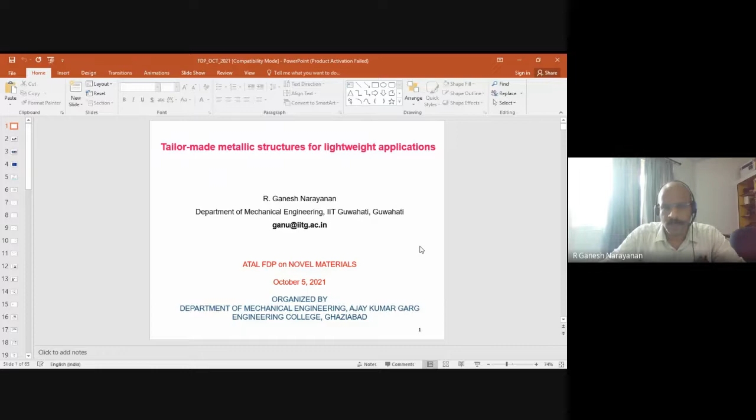Anyway, I think now I am zooming it a little bit and then we will start the session. Okay, sir, I think it's visible, no? Yes, sir. I can go to second slide and you can see this figure. Okay, fine, I think we'll start.

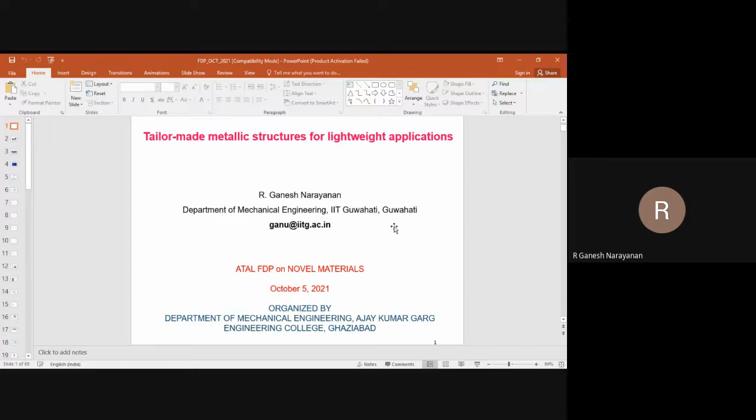And you also know that with materials development or modification in materials, processes also developed. Because not all materials can be manufactured into components with those raw materials with only some processes - a different manufacturing process is needed. So naturally, the original manufacturing process meant for forming or joining of the earlier materials may not be suitable for these new materials or modifications in the original material. So, in parallel to materials development, manufacturing processes also got developed. Basically, it is a materials-manufacturing combination - materials development is supported by manufacturing process, and manufacturing process is also supported by materials development. These two developments cannot be separated.

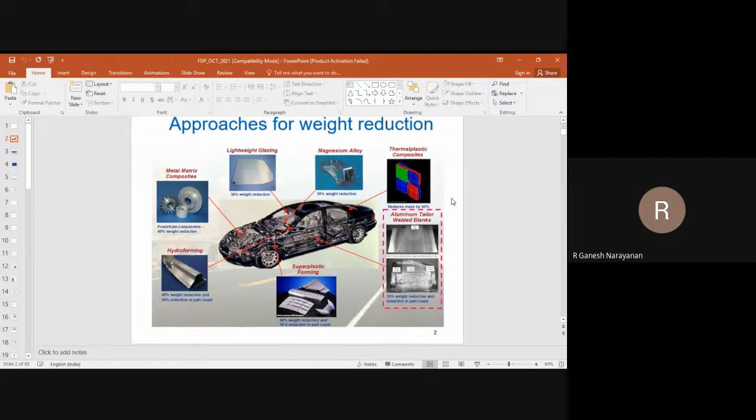So now let us move on to the next slide, and I'm defining here what is the meaning of this tailor-made sheets. So this tailor-made sheets, as the name suggests, basically you can combine sheets like a tailor. This is not something new. Only thing is, people don't usually speak about combining various materials or sheets of different thicknesses or materials.

People spoke about this long before also. For instance, our LPG cylinders are made by two deep drawn components welded at the center. So that type of welding and making a metallic structure is already there - that is not something new. But what is new in this is you can combine different materials and different thicknesses. The more the difference, the more the problem. So sheets of same or different thicknesses and properties are welded, which means they are tailored to a specific shape and size. That's the point here.

Okay, so you have one aluminum grade, you have another aluminum grade. Maybe different grades and different thicknesses, or different grades same thickness, or different grades different thicknesses. Any combination you can weld at a particular portion, and then you can deform that material, form that material to make a component. That is the context here.

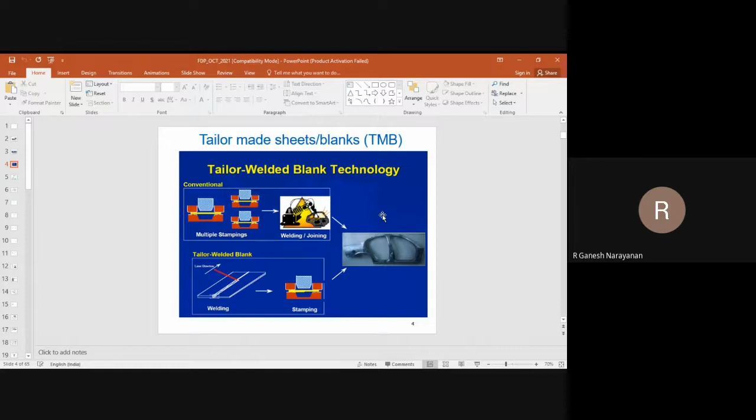So why tailor made blanks? What is the need for that? As the name suggests, it is mainly required for weight reduction, blank weight reduction, number one. And number two, as a result of that, you have fuel consumption benefits, there are a lot of opportunities for cost reduction. And the different components may need different property requirements at different locations.

Say, for example, local strength resistance, local corrosion resistance you may need. So in that case, the material combination is possible in tailor-made blanks or tailor-welded blanks, to make it very specific. So that gives flexibility for component designers. The fourth point, as I mentioned, you can work on different materials and thicknesses.

So there are hundreds and hundreds of journal papers by now in this subject, and that is mainly because of the existence of such technology, right? So we have flexibility for academicians also. But at industry level, you will see that the component designers also have got flexibility. Scrap utilization, which is very important.

So you know that you have a particular size of a sheet, or any metallic structure which will be a scrap. Of course there are strict scrap utilization methods, but what is important here is that scraps can be utilized to make tailor welded sheets or tailor made sheets. And there are chances that you go for fewer spot welds.

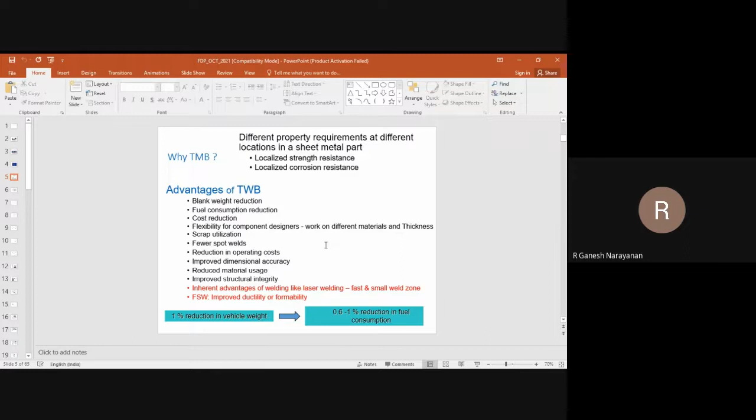You also know nowadays we speak about e-vehicles, isn't it? The fuel concept itself is gone. It's more on the battery aspect. Now there also people speak about lightweight components, lightweight batteries, use of different materials, all those things.

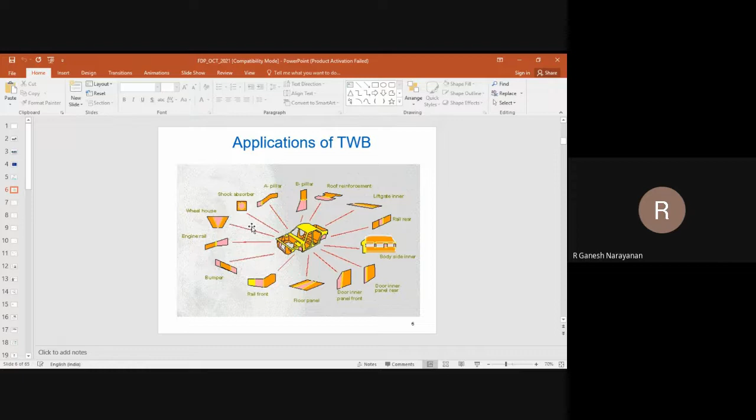It is also possible that in the cars that we use in day-to-day life can have such components already existing in it. Probably we may not know, because the weld zone is going to be very small. We may not even know it.

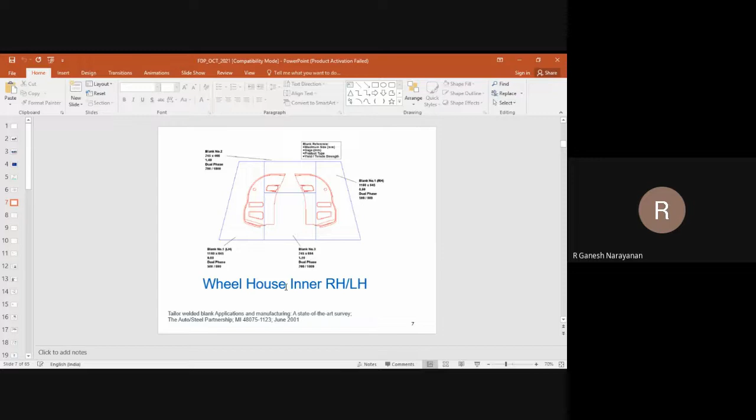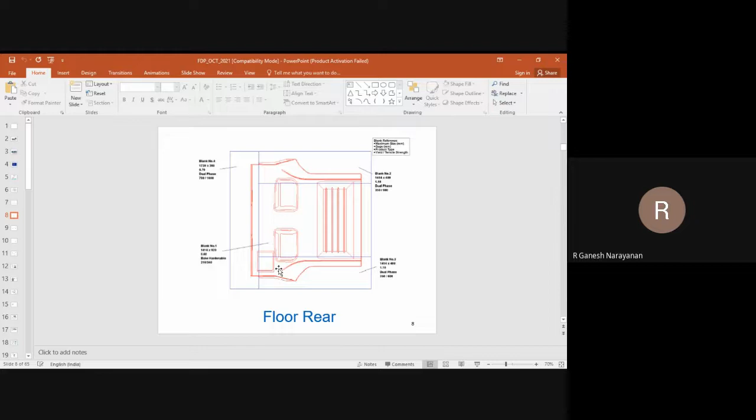This particular component is called wheelhouse inner, floor rear. Here also you will see dual phase steel, dual phase steel, dual phase steel, and different material combinations: 350,600 with 210/340 and 700/1000. And 0.7 is to 1.1 is to 1.1 is to 0.6. 1, 2, 3, 4 — four different materials totally. They are welded here.

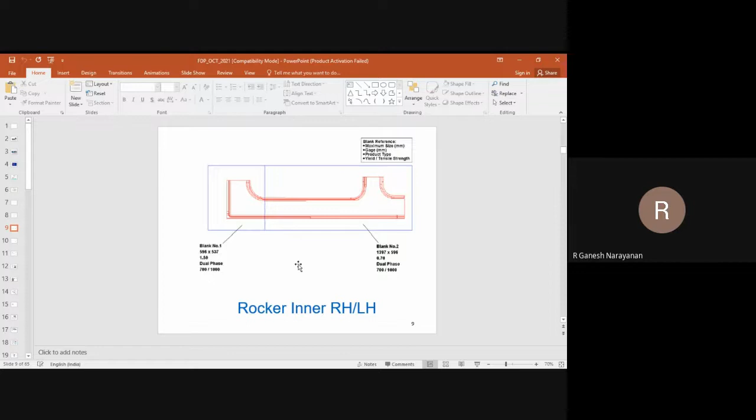Body side outer is a very classic example: 1,2,3,4,5 — five different parts are there. This is bake hardenable steel, dual phase, bake hardenable steel. These are all different high strength steel and advanced high strength steel. We are not going to discuss much on that, but this will give you an idea of what kind of materials are used: 0.7, 1.5, 1.8, 1.2, 0.7. So these are all a variety of materials and thicknesses, welded together to make this particular component.

Ultimate aim is weight reduction and component efficiency, improving the component efficiency. Again, different examples: you can have a single straight weld, multiple straight welds. I gave you an example — single straight weld, here you can see multiple straight welds.

Angular welds are possible, we have seen examples. Non-linear weld lines are also possible, you can have curvilinear welds. That depends on how you optimize the size of the sheet and shape of the weld.

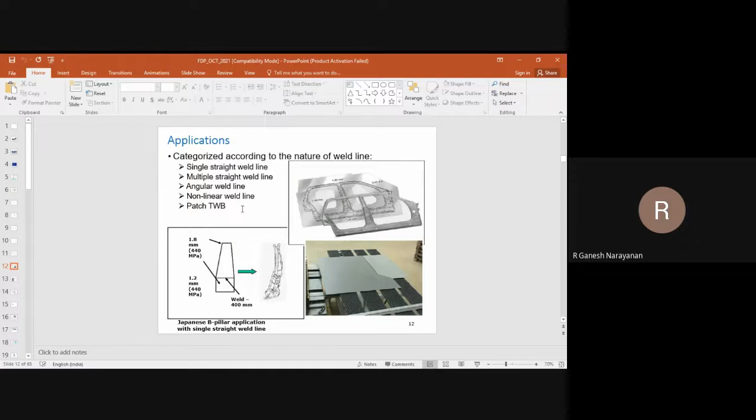Patch TWB is also possible. Patch TWB means you keep the sheets one above the other, like I gave some example here. This is before forming, and this is after forming. You can see one sheet is above the other. There are two patches joined with spot welds actually, but this is also called tailor welded blanks. Instead of joining them in a plane, this is made one above the other.

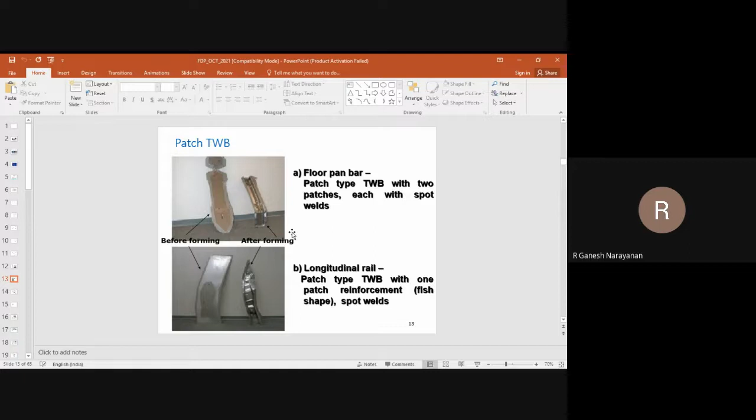So now, with this introduction, we are slowly moving into certain important, crucial parameters which determine the overall forming behavior of these tailor welded blanks. Later on, we will extend that for other methods of making these tailor-made sheets. In that context, I would like to tell you very briefly about something called the forming limit curve.

This forming limit curve is generally drawn between major strain and minor strain. The curve itself is this V-shaped curve inside the diagram, and the whole diagram is called the forming limit diagram. This is mainly used to evaluate the formability of sheets.

Like tensile behavior, like we generally do in the lab also, isn't it? We take a rod or a sheet, make it into a dog bone type of shape, and then do a tensile test in a UTM to get its stress-strain behavior and various mechanical properties, correct?

So now the point here is this forming limit curve is also like that kind of material property. If you don't do anything to the material, the forming limit curve generally does not change, like stress-strain behavior. And in stress-strain behavior, you have something called ductility.

Ductility gives you some idea about the limit of useful deformation. We know uniform elongation and total elongation, correct. Uniform elongation corresponds to UTS, and total elongation is at final failure. These two quantities are generally used to quantify ductility. But generally total elongation is the ductility - we say 30% means you can deform the material up to 30%, and within that you get useful forming behavior, formability, or useful permanent shape change.

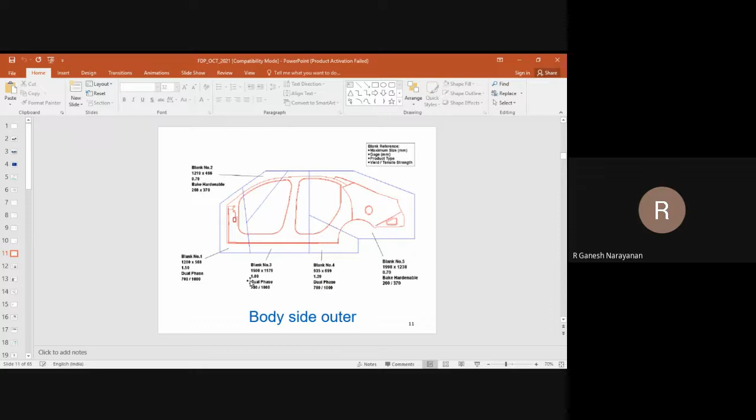Thickness ratio - I already gave you several examples before. Thickness ratio means thinner sheet thickness to thicker sheet thickness. For example, here, if you see 1.5 to 1.8, and then 1.2 to 0.7. So if you take these two sheets, left and right, 1.5 to 1.8, that 1.5 divided by 1.8 is nothing but the thickness ratio.

Sometimes you can do vice versa also, thicker to thinner also possible. Similarly, you can have strength ratio also.

Then weld orientation comes into picture. What is the orientation of weld with respect to loading direction - that comes into picture. Materials welded, that's what I told you, strength ratio.

Welding process adopted - laser welding, friction stir welding, we will see some examples. Which welding process are you going to use? Same material, same thickness, but what process are you going to adopt? Welding parameters - once you enter into one welding process, there are several parameters, right?

For example, take laser welding - examples are speed, power, intensity. For friction stir welding, I will give you some examples - there are several parameters.

Weld orientation with respect to rolling direction of the sheet is also important. Here, weld orientation is relevant to loading direction; here, weld orientation is with respect to rolling direction. Both are important. So loading direction, rolling direction, weld orientation - these three combinations are important.

So what I am saying is, other than the properties of one sheet, there are specific additional properties which are important when you speak about tailor welded sheets. We are going to see some examples of how this affects formability.

Quick examples I will show you here, from existing details - effect of thickness difference and material difference, that means thickness ratio and strength ratio. Along with that, I will also highlight some important details in each one.

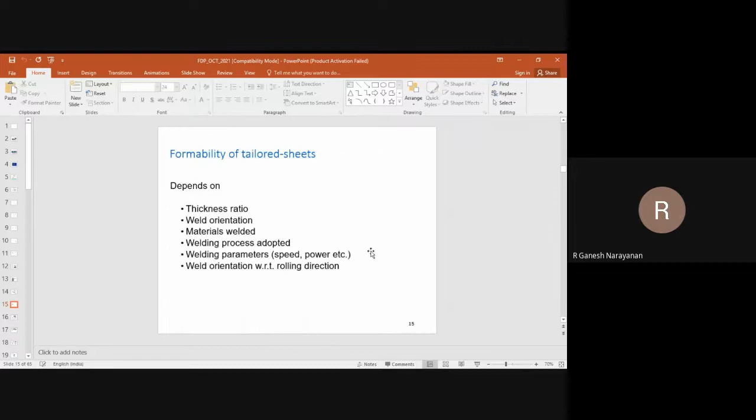This is another example I will give you. Here again Nd:YAG welding is used, the material is a cold roll steel sheet of a particular composition, carbon composition is given, laser details are provided, you can go through this. Shielding gas is again argon, with a gas flow rate of 10 liters per minute. And here the thickness combinations are different.

Thickness combinations are 0.7 to 0.8, 0.8 is to 1, and 0.7 is to 1. To get a good weld in these combinations, the power and welding speed also changed. Welding speed remains same at 40 mm per second, but power changed. Only in those conditions will you get full penetration, and that is why it is changed.

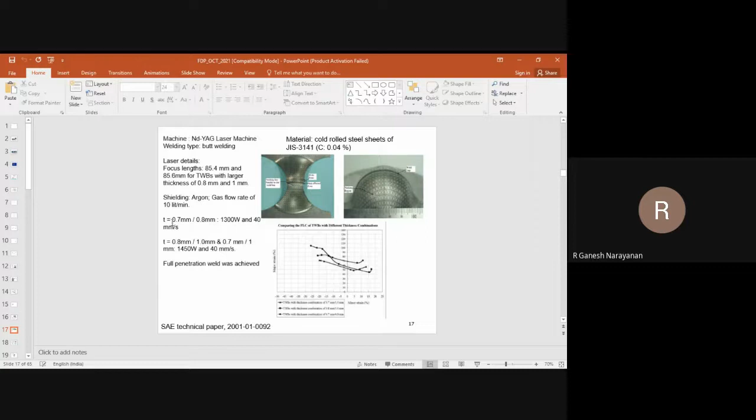It is also possible that you can change material grades also. See, there is one problem in changing the strength of the material. You cannot change the strength of the material alone, keeping all other properties constant, for practical reasons. That's simply not possible. Thickness, to some extent, yes. But then thickness is also a critical question, because when you combine 0.7 is to 0.8, that doesn't mean other mechanical properties are constant between 0.7 and 0.8. That is not possible. But in strength, it is simply not possible.

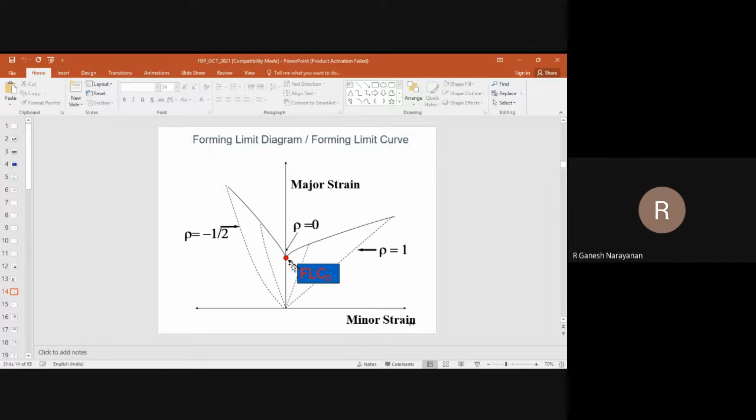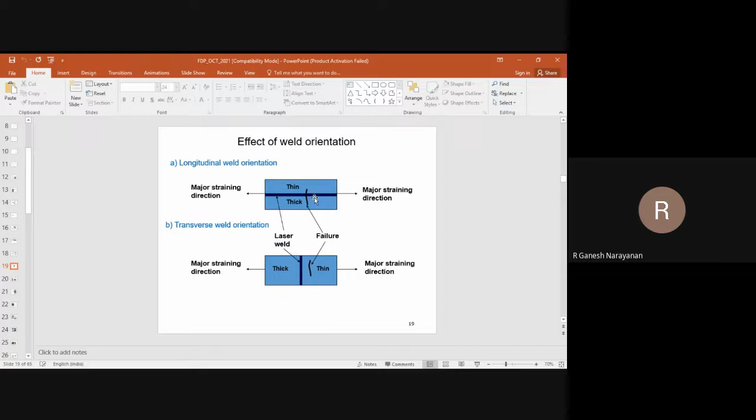Whichever is weaker, the thinner sheet or the weld region, that will fail. I have shown here a failure happening in the thinner one, but you can have failure in the weld zone also. In longitudinal orientation, however, it is always going to be perpendicular.

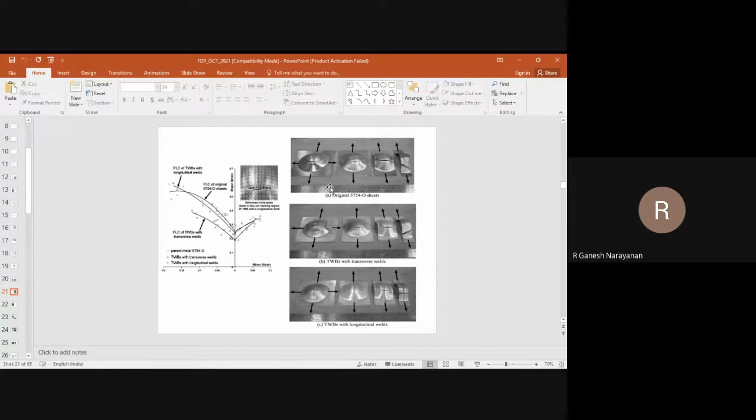See, I have not explained all that. There are separate standard procedures to get forming limit curve of any material, including tailor welded sheets. Like you have standard procedure to get stress-strain behavior.

In a component, location of weld is very important because the weld should not be in a location where failure is going to happen. See, in any component, failure is going to happen in a particular location. Of course, you cannot predict failure because it depends on the material heterogeneity, how it develops, all that. But let us assume that failure is going to repeatedly happen in one particular location. Then it means that weld should not be at that location. It has to be away from that.

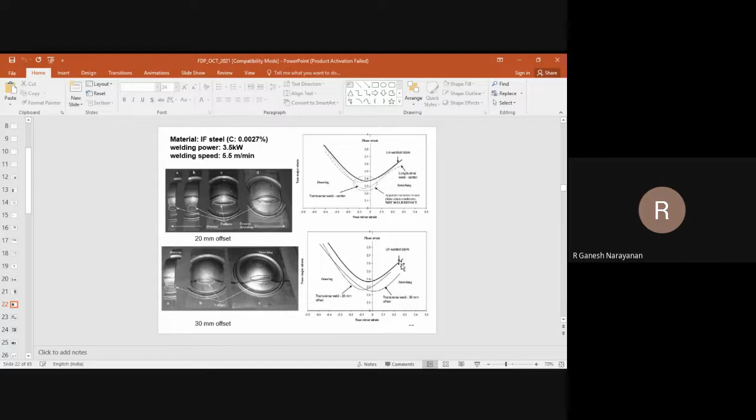Okay, crashworthiness of tailor welded blank is very important. Crashworthiness means like a crash type of situation - how worth is the tailor welded blank in doing such type of situation is basically determined by crashworthiness. Like I gave an example of a bumper, isn't it? Which is generally seen on the front side of any automotive car, or a Jeep, right? So when it hits a rigid body, like a wall or something, or during an accident, that is the main part which is going to take up the entire shock, isn't it?

So if you're going to make such type of components with the tailor welded blanks, what's going to happen? That's what it's going to tell you. They have made tubes, square tubes out of tailor welded sheets, and they are going to actually crush it, either by quasi-static test or by dynamic testing.

Okay, and they have used DP600 with different thickness combinations, you can see, and axial crushing test was performed, and they have also done different orientations. Okay, I'll slightly zoom it so that you can see this bar chart. After that, I will unzoom it. Okay, so you will see that. Oh, sorry.

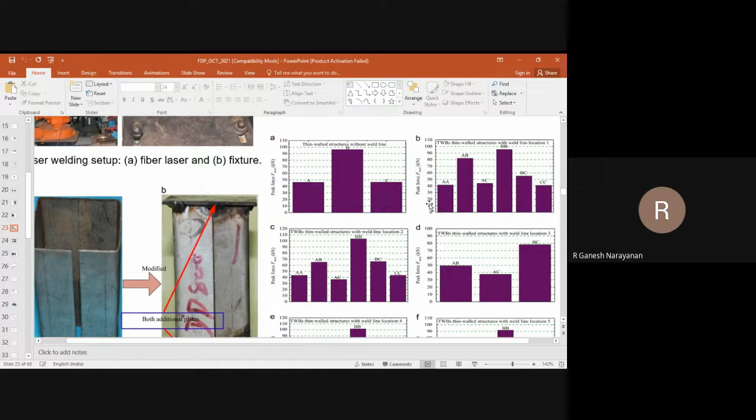Let us zoom in and see this. So the y-axis is peak force, and the x-axis has some nominations they have. The nominations are A, B, C. These A, B, C are different combinations. That much I can tell you, and I can tell you that peak force is different for different combinations.

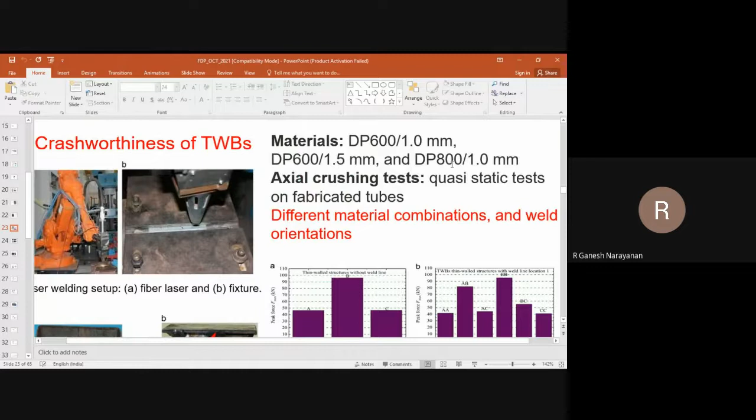A is for one particular welded blank. Let us say DP600 1mm, DP600 1.5mm, DP800 1mm - A, B, C you can keep. And you can see the peak force during that axial crushing test is this much for different combinations: AA, AB, AC, BB, BC, CC.

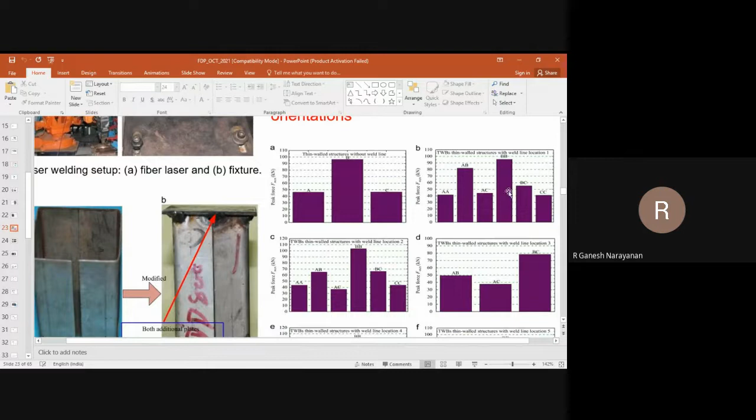This is with weld orientation or weld location 1, weld location 2, weld location 3, and different combinations. All are possible, and they have evaluated the peak force. In all these combinations, the main idea is which material is good - whether A is good, B is good, or C is good - and which combination is good.

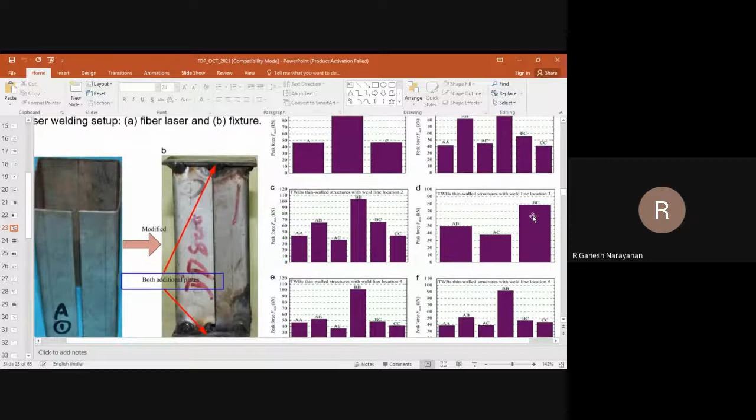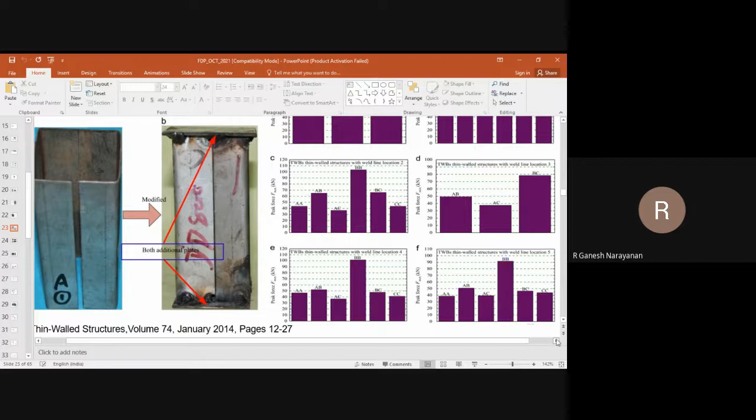You can see BB can take larger peak force. In this case, BC can take it. In this case, BB, and in this case, BB. So depending on the combination of material and weld location, which material is good can be optimized from this particular graph. I'm just trying to appreciate the outputs they measured and how they select material.

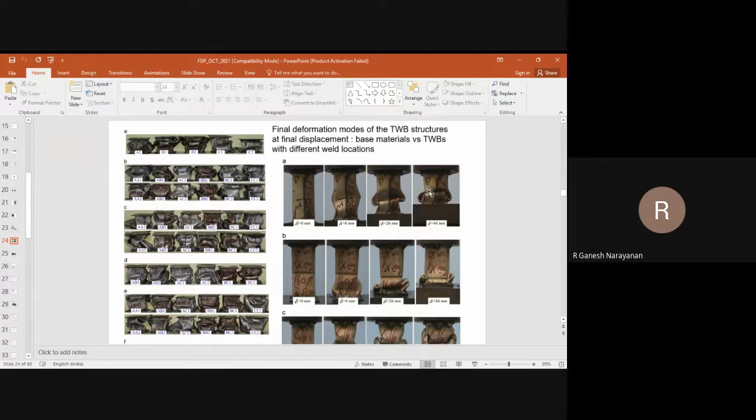These are some photographs at different stages showing how the material deforms during axial crushing. This is quasi-static - basically in a UTM, just compress it. And the failure behavior also shows different stages. You can see different combinations at 0, 6mm, 26mm, 44mm. They take photo shots and have given you here their forming behavior, failure behavior, and the bending pattern also is going to be different.

One should appreciate the combinations of this, and whichever is acceptable, we have to pick up that kind of material combination and use it for making such type of components. So other than forming behavior, crushing is also very, very important. That's what this diagram, this study is going to tell.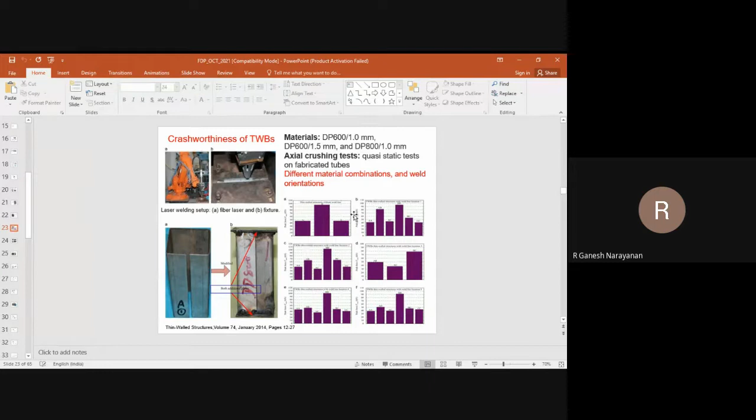Along with that, different material combinations, different thicknesses, different orientations. You can see in the last photograph, the bottom C photograph, the 45-degree orientation. The first one is longitudinal, the second middle one is transverse. Forming limit, tensile behavior, crushing behavior, thickness ratio, strength combination, orientation, location - all these things are important given a particular welding process.

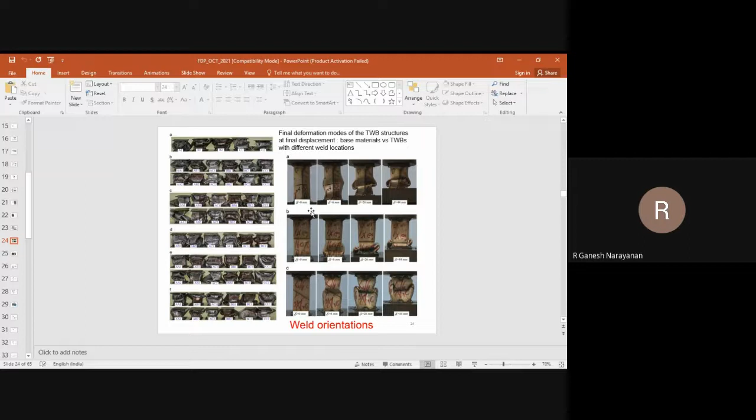Now there are some problems in welded blanks. One important problem, of course, is forming limit is reduced, ductility is reduced, and you have to enhance it - all those things are fine. Typically, the weld line moves. When you perform deep drawing, the weld line is not going to be at one location - it moves to a different location after the component is made.

For example, you can see here this round cup is formed, wherein the weld has to be at the center, right? But you will see in the first photograph, the weld is at a critical location. In the right side photo, the weld is at the center - that is because they have done something with the process.

Why does the weld line move? It moves because there is different drawing resistance in the materials. One material will have one drawing resistance compared to the other, so one is going to pull the other material, and the weld line automatically moves. But we don't want that, right? We want the weld to be at one particular location only. So how to avoid this weld line movement?

The first way is giving different blank holding force. In this case, a constant blank holding force is used - that is 5 tons. But in this case, if you see, they have used a variable blank holding force - on the thinner side they use 10 tons, on the thicker side they use 1 ton only. So you resist the movement of the thinner material so that your weld zone stays at the center. So one way to avoid weld line movement is to provide different blank holding force.

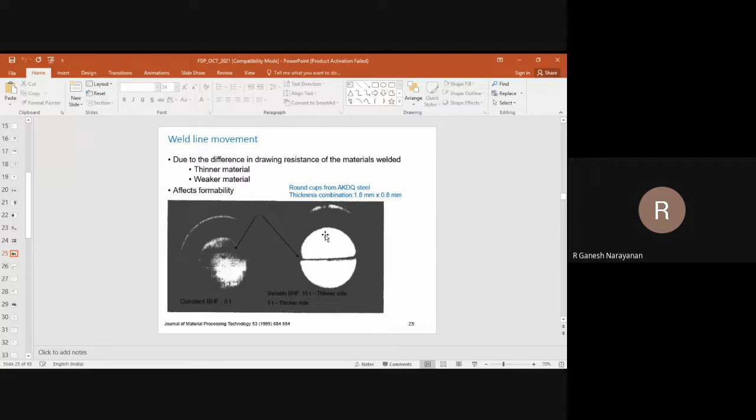Draw bead can be used on the thinner side. When you do deep drawing, one side is thinner, one is thicker. The purpose of draw bead is to resist the weld line, resist the sheet movement. So you provide draw bead, or different profiles or dimensions of draw bead, on the thinner side, while on the thicker side you don't have draw bead at all. That way also you can resist the weld line movement.

Location of draw bead - this is very common sense, right? So you made a laser welded blank with beam power, welding speed, flow rate, everything fine. Now for thickness combinations like 0.8 to 1.2, 0.8 to 1.6, for one particular steel - this is common sense - when you know finally the location it's going to end up at, you can initially place the weld line at an offset, so that when you deform the material, it ends up at the desired location. That's what they have done.

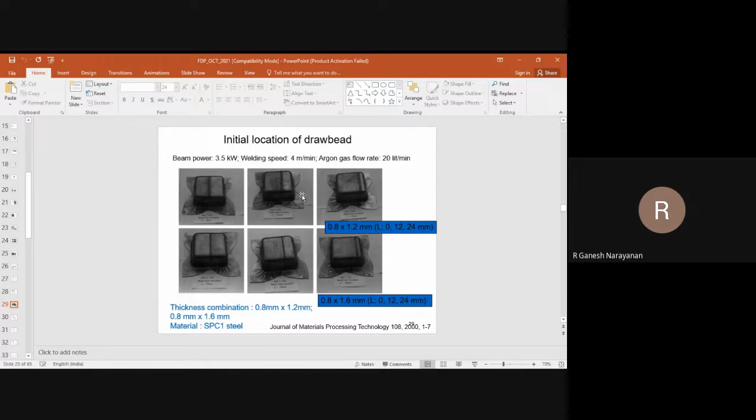These are some data points available. So weld line movement can be avoided. I'm just summarizing that by providing different blank holding pressure, a different clamping system, provision of draw bead with different dimensions or shape, and by changing the initial location itself. These are certain important methods of avoiding weld line movement.

Now another important problem: suppose you make tailor welded blanks using laser weld, and you know the laser weld generates a weld zone which is very, very small. Sheet properties you can get from tensile test, correct? How do you get weld zone properties, since its width is very small? There are some strategies available, because when you do modeling - I'm not showing any example for modeling, but I'll tell you the significance - you have to give input for weld zone properties, the entire stress strain behavior has to be given as input.

So how do you get weld zone properties? There are two different methods. One, you make a tensile sample such that the gauge width is occupied by the entire weld zone only. In this photo, you see only the weld zone is available, no base material. You clamp it in UTM and do tensile testing, and you get a stress strain behavior. That is nothing but the stress strain behavior of the weld zone - true stress versus strain, I am giving here, you will get this.

But you have to fabricate a sample like this. You have to use wire EDM to cut the sample such that there is no base material combination, all those things. There are other methods also - a simple mechanics approach is also possible.

Suppose you take a longitudinal weld like this and do tensile testing. Load sharing principle is possible - the total load will be equal to P1 plus P2 plus PW. That can be converted into a stress strain behavior, giving a simple equation between sigma W and epsilon W. These are variables: K1, N1, the strength coefficient and strain hardening exponent of base material 1, similarly K2, A2, N2 for material 2. Area can be evaluated, P is the total load given by the machine. So you substitute all these properties, and for different values of epsilon W, you get different sigma W, giving you the stress strain behavior.

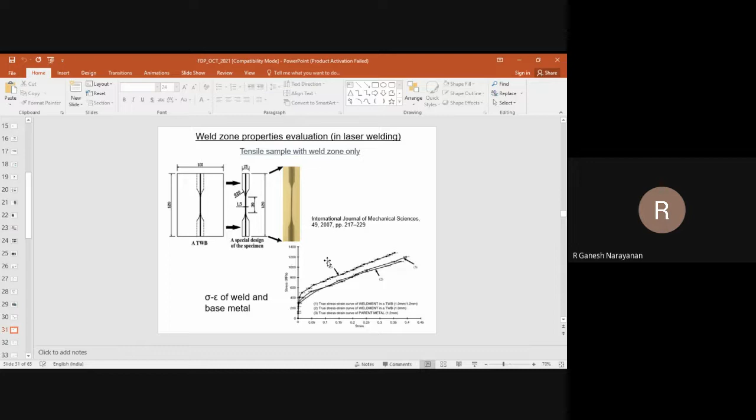The same thing is also possible in transverse weld. Only difference is in longitudinal weld, load is additive, while in transverse weld, strain is additive. Load is the same in all the regions. In that way, you can get this stress strain behavior analytically also.

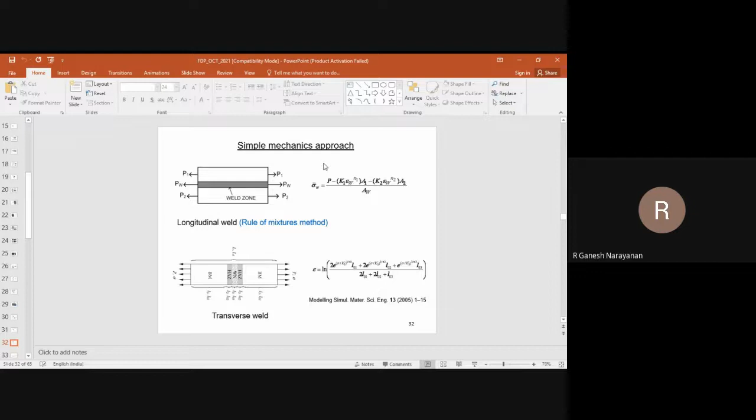There are some research papers where you can compare these two. All those things are possible. Let me give you an example of how they evaluated it.

So now, other than laser welding, there are other welding methods. Friction stir welding is one more method.

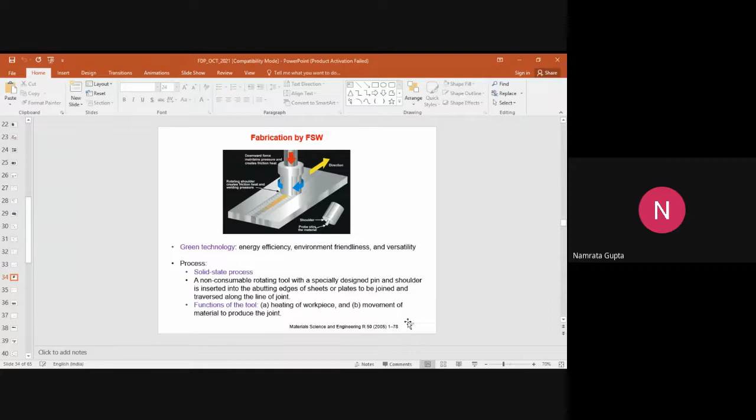So that's what about laser welded sheets. Similar concepts, whatever we discussed, are suitable for other welding processes also. So the only thing that's going to change is the welding parameters.

Now friction stir welding is another process people use to fabricate such tailor-made structures. And you all know that friction stir welding is a solid-state welding process. It basically uses a rigid tool, or non-consumable tool, you can say.

It has a pin and a shoulder, like the way it is shown here, and it is inserted into the plates or sheets to be welded. It gives an axial force on the sheet, and it is also rotated and traversed along the direction in which you are going to weld. So mainly the welding happens because of plastic deformation of the plates or sheets and material mixing.

Unlike fusion welding processes like laser welding, here it happens in a solid state. It's a green technology, it has good energy efficiency, environmental friendliness, eco-friendliness, and a lot of flexibility and versatility.

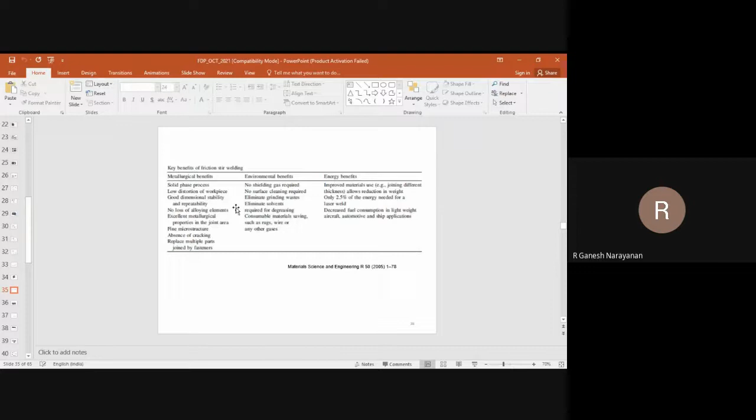Energy benefits include improved material use, different thicknesses, and different weight reductions are possible. Only 2.5% of the energy needed for laser welding is used here. So all these are basically benefits of friction stir welding in general, and of course this can also be used for making welded sheets or tailor-made sheets. The advantages are carried forward, so now I will just highlight the forming behavior.

Okay, I will tell you some quick case studies. Here, aluminum 6 series with 2 mm thickness, same material and same thickness, are welded to keep things simple. What combinations can there be? Welding speed can be changed, rotation speed can be changed, shoulder diameter can be changed, plunge depth can be changed, tilt angle can be changed. There are several parameters that can be changed, and you can deform the material like this up to the limit.

of its formability, and you can get the forming limit curve. I'll just give you an overview, not details. This is again a forming limit curve. Imagine you have done lab scale experiments and got the forming limit curve on the right hand side only. The left hand side of the diagram is not there, only the right hand side is given as example. And here you will see it is exactly opposite to what you saw in the laser welded case.

In laser welding, predominantly you will see the welded sheet has got lesser forming limit. But here you will see this black color one is unwelded, and both the welded blanks have got better formability as compared to unwelded. You see that? That's what I was telling you - the welding process will have its own inherent advantage, and this inherent advantage improves the formability.

So you can see the unwelded blank has got only this much of window, while on the other hand the welded blanks have got a larger window depending on the welding speed and rotation speed. So the uppermost one, which has got 1400 RPM, has got better forming limit as compared to 1300 RPM. So increase in RPM actually increases the forming limit. Both the welded sheets have got better formability as compared to the unwelded sheet. This is a very good example.

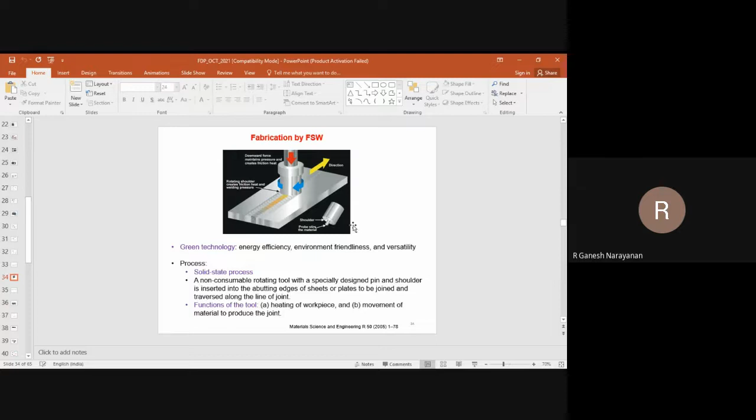Similarly, you can have other parameters in this. I will give you an example - you can change the plunge depth, you can change the plunge speed, you can change the shoulder dimensions, pin dimensions, shoulder profile, pin profile. I think several of you must be working on friction stir welding by now, and you can see all these parameters can affect the formability.

Spring back can also be controlled. This is another example - you see a V bending done, the first figure. The second photo shows that after load removal, there is a relaxation of the sheet. That spring back can be controlled with the help of friction stir welding. The spring back angle is shown as a function of rotation speed, welding speed, and shoulder diameter in these two figures.

You will see that the red color and pink color boundary are for the normal base sheets, and all the friction stir welded sheets fall in between. You can see 6 series near one boundary, 5 series near the other. So when you combine 6 series and 5 series and make friction stir welded sheets, it falls in between. Similarly, the pink color one is another spring back, theta 2, and here also the spring back falls in between. Spring back angle means the angle between the new angle and the original angle which you want to deform, that's all - either delta theta or the new theta, either way you can put it.

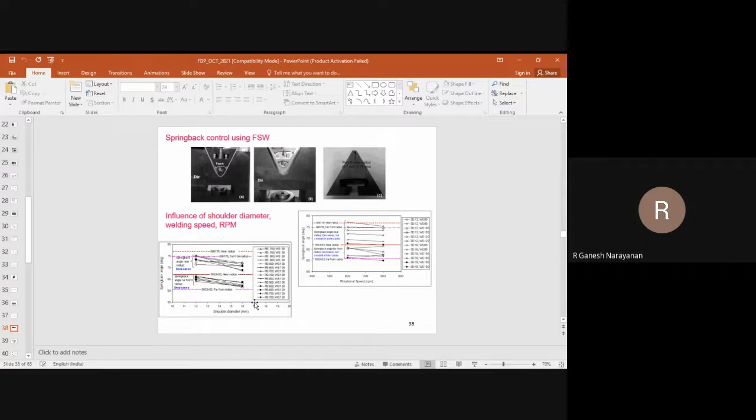You can see that with increase in shoulder diameter on the x-axis, your spring back angle reduces, which is good - we don't want spring back, we want lesser spring back. So spring back can be reduced using friction stir welded sheets, using friction stir processing, using a particular combination of shoulder diameter, RPM, and welding speed. So you can control the stamping behavior, forming behavior, or spring back using friction stir welding.

End forming example - tubes can be formed. Cylindrical tubes are available, like water cans. Water cans have end reduction, meaning a tube is formed at the end, expanded at this end, and bulged at the ends. Similarly, you can have friction stir welded tubes and you can have such expansion, reduction, and beading. This is the simplest example, but a more complex example could be different combinations of thickness and materials made into tubes by friction stir welding. You can take two semicircular parts of the tube which have different thicknesses and they can be welded.

Right now, you have one aluminum tube 1 mm thick and another of same material 1.5 mm thick. You can cut both into halves axially and put the 1 mm and 1.5 mm halves together, then weld it. This creates another tube with lesser weight because the volume and thickness of material is reduced, so overall weight reduction is possible.

Which welding will you use? You can use friction stir welding. And again, you can go for manufacturing processes like end forming, reduction, and beading.

While doing so, it has been found that the energy absorption during this quasi-static end forming of these welded blanks or processed tubes can be at par with the parent tube. Some examples are given here.

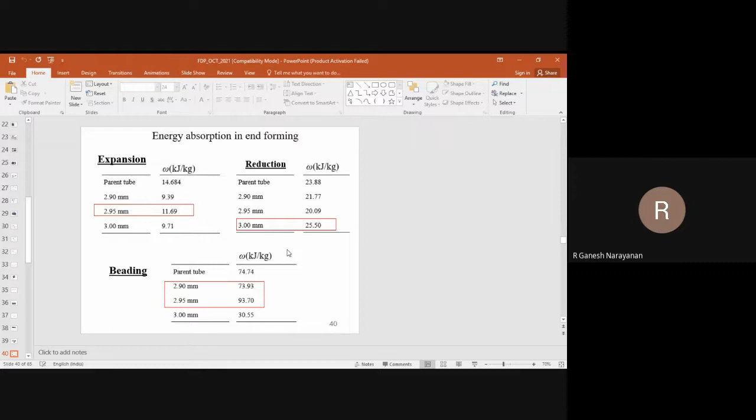In one case, it is less. In the other case, it is better in reduction. In beading, it is also closer to that of the parent tube, which is a good development from the friction stir welded blanks point of view.

This end forming, as an extension of this, can be used to join sheets, join metallic structures, join sheets to tubes, join tube to tubes.

So you want a tailor-made structure, no? Tailor-made structures can be made using end forming also. It is not a metallurgical joint, but a mechanical joint.

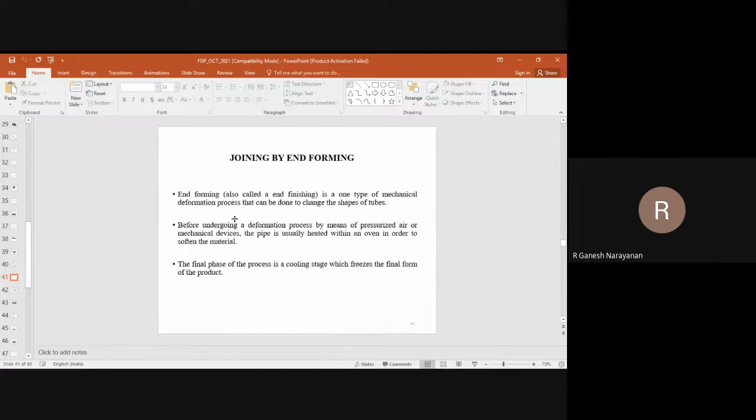How is it possible? For example, this metallic tube can be joined with another tube to make a metallic structure, the whole system, and they are joined by end forming only. You can see that scheme is provided here.

What they have done here is both tubes are bulged at the ends and they are clamped within each other. You can see the middle schematic. The inner tube is bulged at the end, the outer tube is also bulged at the end at the same time, and they are clamped within each other to make one system, one long tube made of two short tubes, but joined by end forming.

So instead of welding at the ends, they are joined by end forming. You can also go for fusion welding, or circumferential friction stir welding, but we don't do that. There is no metallurgical bonding required; mechanical locking itself is sufficient.

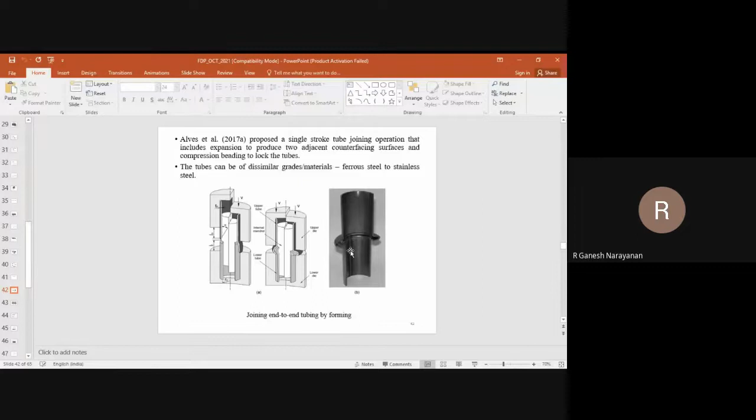One main advantage of this is the significant strain hardening that happens in such a bulging process. That strain hardening enhances the locking ability as well as the joint strength.

What is the main advantage? Again, only the tube is deformed; the sheet is undeformed at all, so it is not going to have any change in properties. If you use fusion welding, both will have a change in properties. If you use friction stir welding, again, both will have change in properties.

But these two structures are perpendicular to each other, so I don't know how you will go for friction stir welding. Maybe it's very difficult. Laser welding is possible because it is non-contact, but friction stir welding requires designing a specific tool.

But here, you can have a simple die and punch. Simple machines like UTM can be used, and you locally deform the material—only the tube—to join these two structures. This is also a tailor-made structure only. There are several locations where sheets are joined to pillars and tubes.

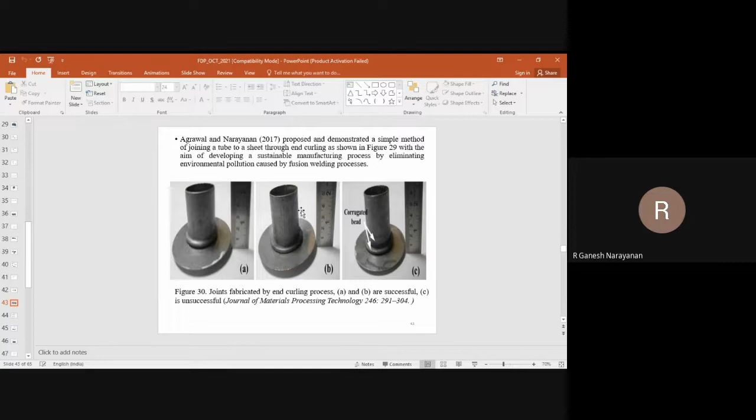Joining of tube to tube is also possible, like rotary swage forming, which we teach in manufacturing processes. Using that, you can join tubes like this. At the end of the tube, one inner tube and outer tube are joined mechanically at one location by rotary swage.

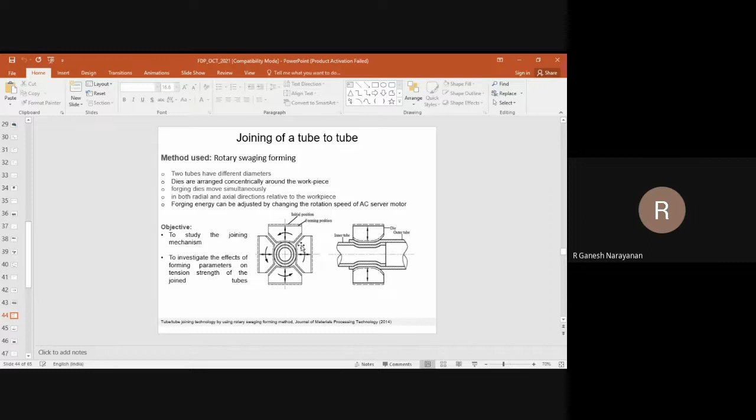This is another method where tube to tube can be joined. You can see different diameters - the inner tube has a smaller diameter compared to the outer tube. The schematic is shown here very nicely.

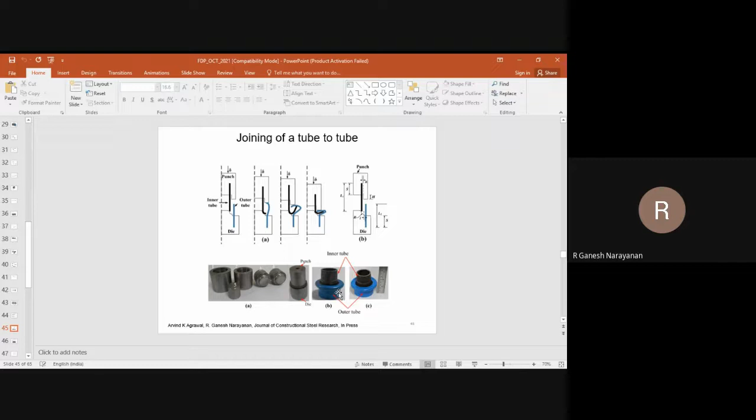This combination of tubes can be used for any transportation purposes - if you want to transfer fluids, all those things can be used. Where there is a restriction on the length of the tube, instead of welding to join these two tubes, this type of end forming can also be used for joining. There's no metallurgical bonding, no fumes, nothing - only with strain hardening can you join these two tubes. There are a lot of inherent advantages, and it is sustainable.

This is another typical process that we did recently, a couple of years before. A lathe machine can be used to join metallic structures. We generally use a lathe to go for turning and other machining processes, right, like a typical BTech lab. But here, you can see in the rotating chuck, you hold and clamp a circular rod - a typical metallic rod, though it could be non-metallic also.

There is a sheet, but the sheet needs to have a hole, which you keep ready. Now what do you do? You create a tool which has got a blunt edge like this. This tool is actually made of tool steel, which should be stronger than the deformable rod material. A tool can have any profile - I'm giving you two profiles here: one is blunt, the other is also blunt but with a little sharper edge.

Now what do you do? You clamp it in the tool post and make the tool post move along the rail. Once the tool contacts the deformable rod, the rod will undergo plastic deformation - it won't remove material, it will deform like this. Circumferentially, it undergoes plastic deformation because it's a rotating deformable rod, and this tool is moving perpendicular to the rod. It's a rigid tool, so naturally the deformable rod undergoes plastic deformation, which occurs in the form of accumulation - the material gets plastically deformed and accumulates at one location.

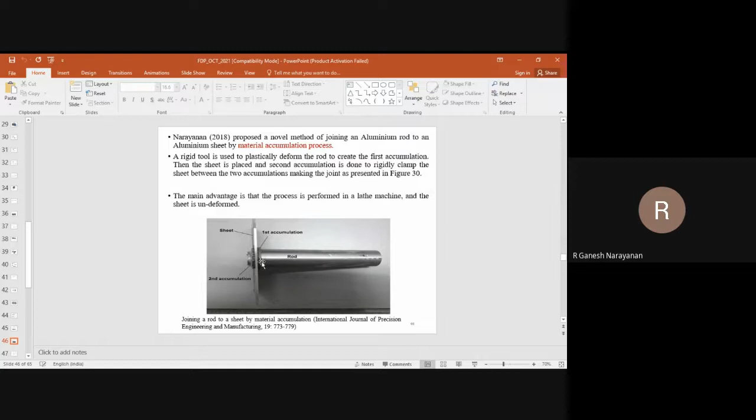It's a tailor-made structure. Imagine now the rod is made of nylon, or let's say polyurethane. How do you join that type of material with a sheet? You cannot use fusion welding, you cannot use friction stir welding, and I don't see any other welding option. Maybe you can use adhesive bonding, but that's not going to be that strong. This type of method can be used to join such structures, and it is quite strong because this rod is heavily strain hardened.

These are all different stages being shown. You can see the first accumulation: the aluminum rod is held, but the tool is made of tool steel, and the first sheet is kept here. The second accumulation is done, and finally two structures are made. These are laser welded sheets, friction stir welded sheets, and tailor-made structures made of mechanical joining, some examples.

There are other welding methods also. Laser welding has got high equipment cost. High precision cutting is important - end cutting, edge surface, end preparation, edge preparation are all very important. There are varieties of laser welding: Nd:YAG, CO2, fiber laser. Fiber laser is also very advantageous.

Along with that, mash seam welding is also used. It is actually resistance welding that involves sheet end surfaces being overlapped with end crushing, or by rotating electrodes - they get crushed between two rollers, and these rollers act as electrodes also. There are some advantages: good productivity, low equipment cost, and no need for precision cutting, though the edge undergoes deformation. But the problem is it has inferior weld performance, a bad look, and poor weld quality.

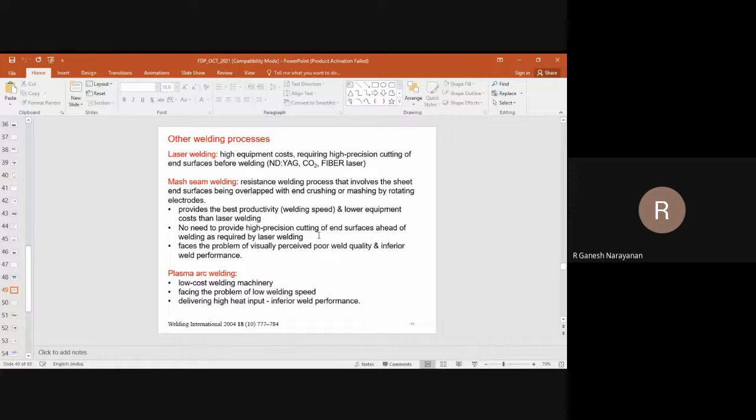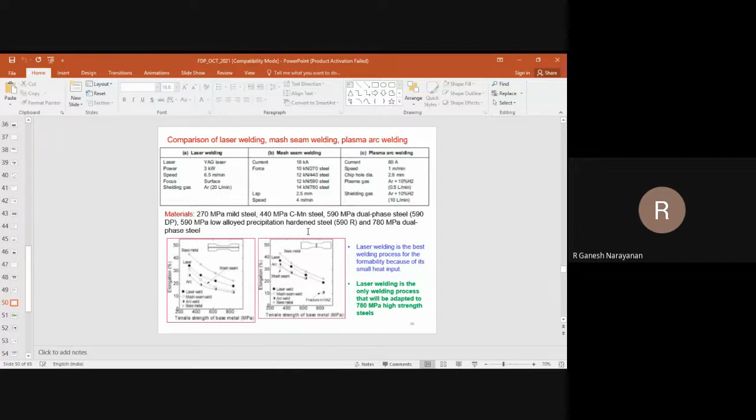This is one example comparing laser welding, mash seam welding, and plasma arc welding - I will not go into the details, but I'll tell you one important result: it has been finally decided that whatever material combination you use, laser welding is the best for high strength materials. Now leave out all those things.

Now, friction stir additive manufacturing is another important, recently studied method for making tailor-made structures. There's laser-based, arc-based, wire arc-based - several varieties of additive manufacturing. Friction stir additive manufacturing is one of them.

What you do here is very simple: you keep one sheet on the other sheet, clamp it, and then just stir it. They are joined one above the other at one location. Keep the third sheet, stir it again. Keep the fourth sheet, stir it again. So 2 layer, 3 layer, 4 layer, several layers can be formed one above the other until you make the structure.

You can see they have also made conceptual designs of how to use such friction stir additive manufactured structures. People say that because of significant advantages and good material properties, they can be used to make stringer type structures, and also rib flange type structures using friction stir additive manufactured structures.

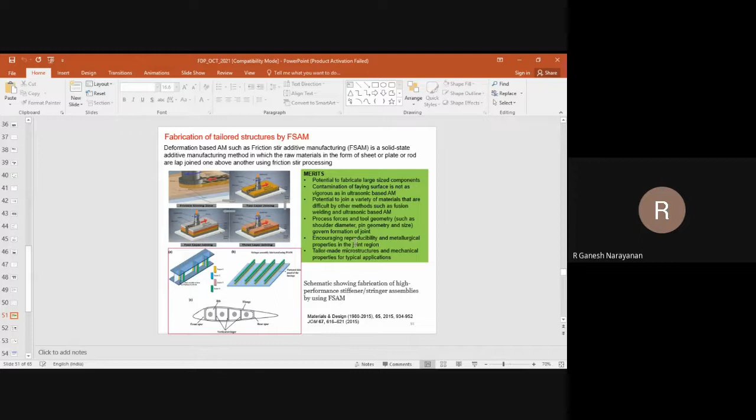So the last section is adhesive bonding. With adhesive bonding also, one can make tailor-made structures. So what is adhesive bonding? It's very simple. You have 2 sheets, you bond them with an adhesive in between. Upper sheet, lower sheet, and there's a green color portion which is adhesive.

This is also predominantly used to make sandwich structures. Sandwich structure is another important material. Good development is going on now, wherein the middle portion, the core region, is going to be a foam or any polymer or metallic foam. Above and below you can have sheets, skins, and they are bonded by adhesive. So the core region is less stiff and less dense, something like that, and you can make bonded sheets.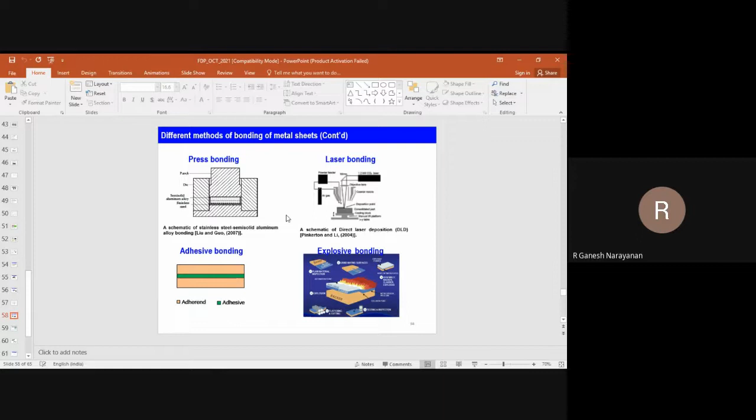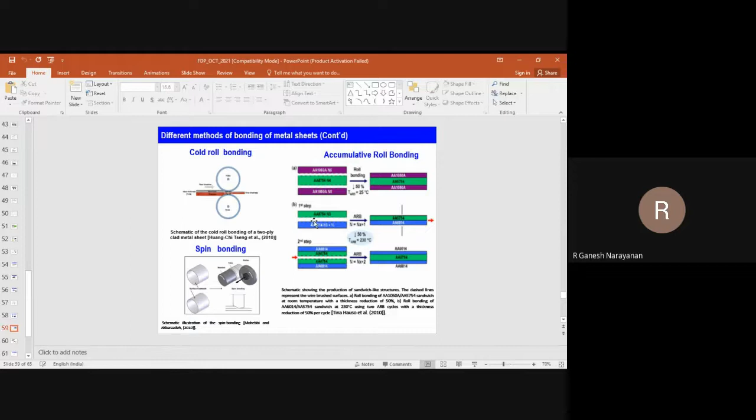Why I am saying this is, you should not think that adhesive bonding is only extra tailor-made material, the only way through which you can make tailor-made materials. You can have explosive bonding also, laser bonding also, press bonding also - all are going to make tailor-made structures. Accumulative roll bonding is also a very important technique by which you can make tailor-made structures.

So now this adhesive bonding also has got inherent flexibility to change its overall deformation behavior. One example is properties of adhesive. It is a sandwich material only, but the core layer is made of adhesive itself, like that. And if you can see this example, it is deep drawing quality steel bonded with stainless steel using epoxy adhesive. You can change epoxy adhesive properties by changing its resin to hardener ratio.

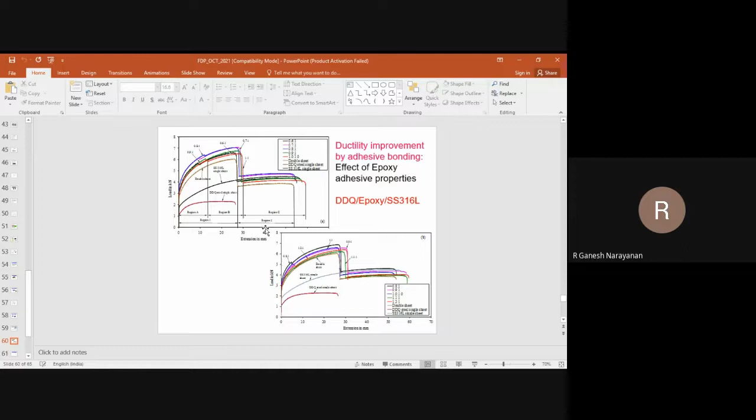By doing that, you will see this is a typical load extension graph. You can see there is a tremendous change in the ductility and load requirements. So you can basically manipulate the stress strain behavior, manipulate the final forming behavior, deformation behavior by changing the core properties, keeping the thickness constant.

Now, this example will tell you how forming limit changes with thickness. You can see Al 5052, a 5 series, is combined with polyethylene. Polyethylene is a polymer core, and they are bonded by adhesive, let us say. The formability of this particular sandwich sheet increases with increase in the thickness of the polyethylene core. That means for the same forming limit, a 3 mm sandwich has got better forming as compared to a 1.5 mm sandwich, and the 2 mm sandwich is in between.

You also know that sandwich sheet is also used for lightweight applications. And if you use this type of combination of materials, and if you change the thickness of the polyethylene core, it is said that formability can improve.

Again, this is another example where if you use lubricant, then you can further enhance the forming behavior. If you put a lubricant during this forming behavior, you can further enhance the formability when compared to dry friction. That's what it says, and that we also know.

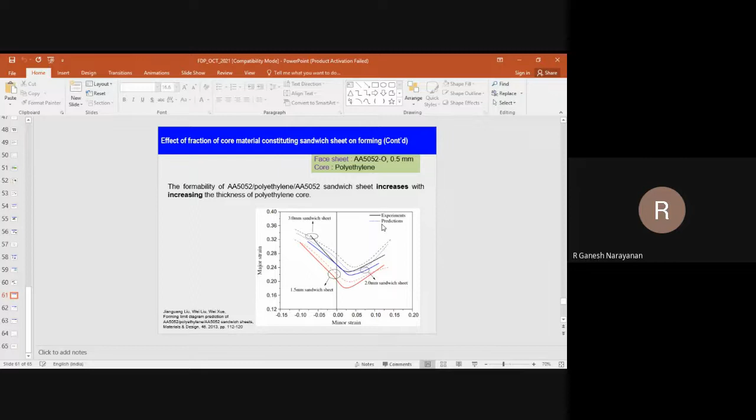This is another example where you can do modeling - deformation modeling of sandwich sheet is a very important task, because other than the base metal properties and core properties, you have to take the adhesion properties in between into numerical modeling. That is very important. So in that way, people use Cohesive Zone Modeling, CZM, as mentioned here. I will not go into details, but you can do modeling work also.

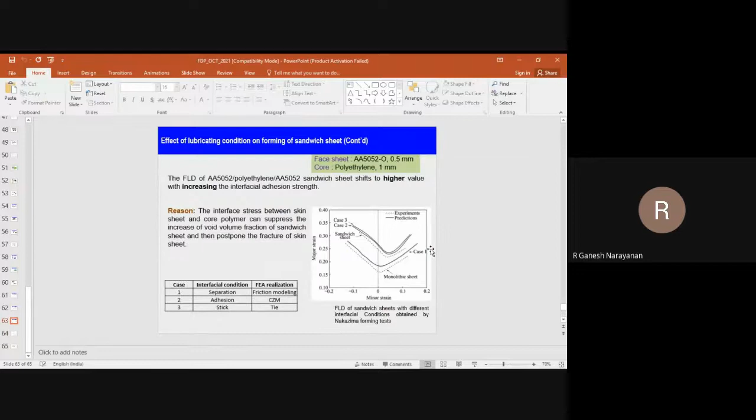0.6 is the best in V bending. You can imagine a V bending, and you are calculating the angle after load is released, and you will see that for 0.6, if you maintain, spring back is going to be less when compared to 1. Some data is provided here. Anyway, I'll stop with this.

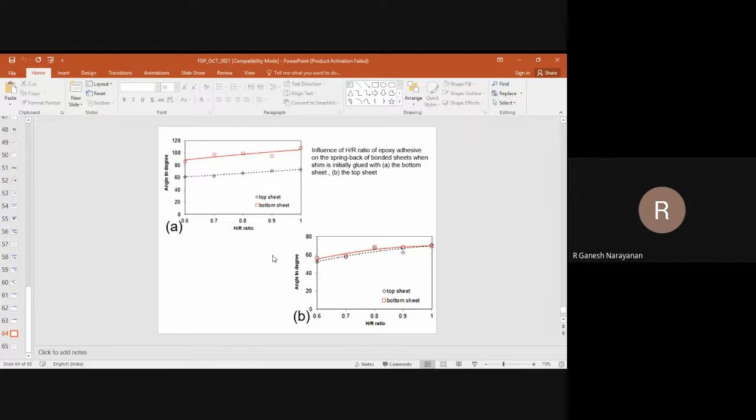I'll make a concluding remark that tailoring sheet is important for various advantages. Tailor-made blanks is a known technology, and you can use varieties of welding processes. You can use friction stir additive manufacturing, adhesive bonding, and accumulated roll bonding to make that kind of structures, and that is going to give you lots and lots of benefits.

For example, TWB, if you take, a lot of flexibility. Multiple welds are possible, non-linear welds, welding methods are possible. This increase in complexity while fabricating tailor-made structures has actually provided a lot of opportunities for scientific research, both practical aspects like experiments as well as modeling aspects, like optimization of parameters, theoretical analysis, all those things. So with that, I'll stop here.

You can have a question session. Thank you.

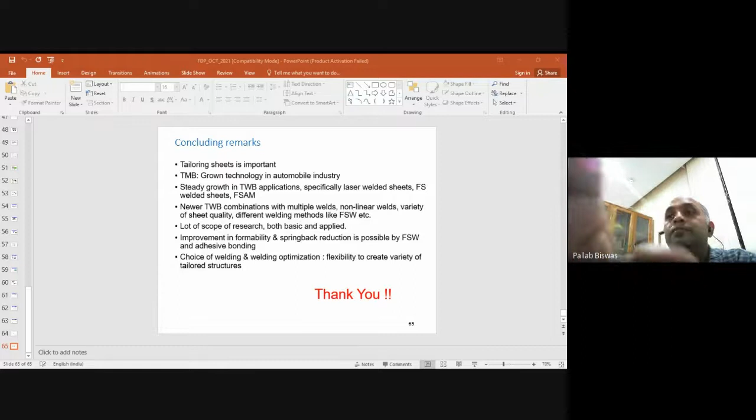Yes, sir, go ahead. Sir, are laser welding and friction stir welding the two main welding processes to weld tailor-made sheets, or are there any other processes to weld these sheets?

See, predominantly laser welding is used for ferrous grades, stainless steel, ferrous steels like that. Aluminum has got some disadvantage. Aluminum is also welded, but it is little difficult to optimize. Friction stir welding is just the opposite, because welding steel, it is possible these days, but it's little difficult because of the tool requirements. It is used mainly for non-ferrous type. So these are the two predominantly used welding methods.

And of course, laser welded blanks are predominantly used these days for the simple reason that it is quick. In just a couple of seconds, few seconds, you can finish that operation. Friction stir welding is a well-developed technique, and it is used to some extent in a variety of materials. There are a lot of applications these days, but these two are the main ones.

That is correct. There are a few others, but not much used, mainly because of industrial restrictions. At the industry scale, you have to use it. That's the main thing. These are the predominantly used ones.

Correct. Okay sir. Sir, with lower thickness ratio of sheets, can we obtain higher formability? Yes. So sir, sheets are welded at the edges in order to make tailor-made sheets. So what happens during forming, is there any chance of weld region failure during deformation? Yes, very well possible.

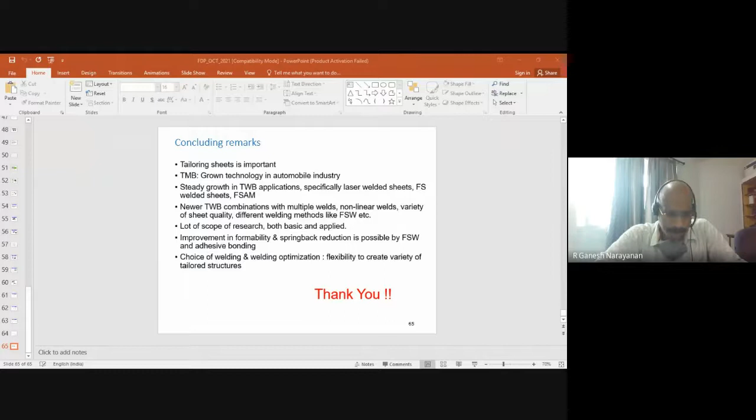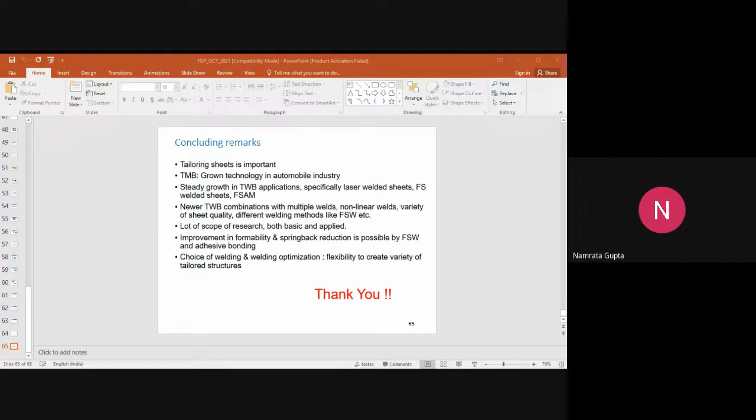Yes sir, one more question I am having. Sir, in friction stir additive manufacturing, sheets are stacked one over the other to produce additively manufactured components using a non-consumable metallic tool, I think. So can we use a consumable tool to manufacture the FSAM components? Yes, that is possible. In fact, this example I showed, actually I did not say that because of the time restriction, this example only.

If you see this example, here you will see a rotating shoulder during additive friction stir deposition. It is a deposition actually. You will see that the shoulder has got a hole inside, and in that there is a filler material.

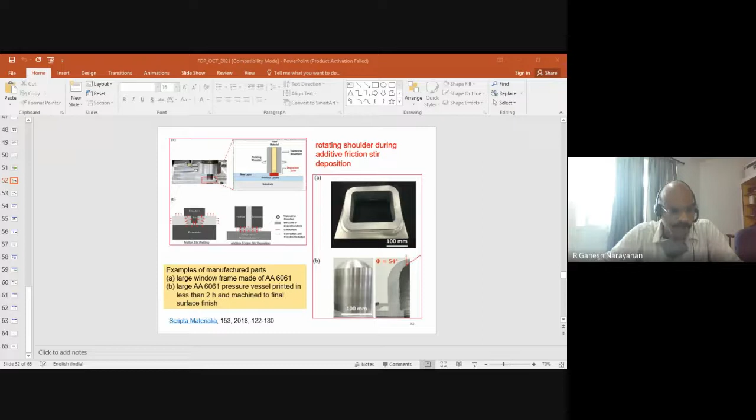Yes sir. That yellow color patch is a filler material, and while moving, that filler material keeps coming in, and then it gets settled, deposited, and they make the structures. So yes, definitely sir, it is possible, and without filler material also it is possible. Without filler material, deposition is also possible—basically the tool is non-consumable. That is also possible.